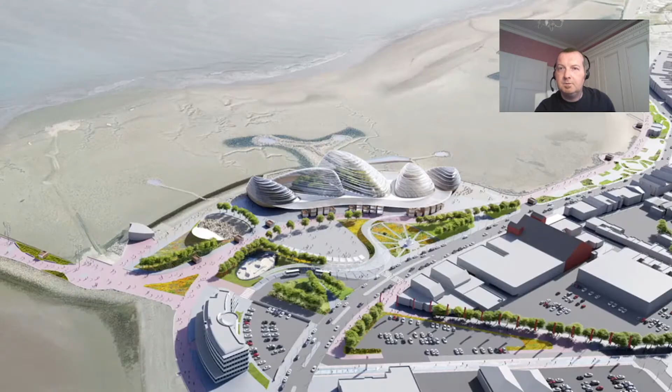This is the design from Grimshaw's architects that were released, I think, back in 2019 - a series of buildings that make reference to the shells, particularly mussel bed shells, that line the shores of Morecambe Bay. Now, the architects have made clear that the building is still an outline design, but the aspirations are for the scheme to reflect the rich sea life of the bay.

It's quite clear that the design of the proposition is very different from the existing context. Now, I say this not to be critical in any way of the scheme, rather just to recognise that the function and scale of the proposal is very different from that of its close surroundings, very similar as well to the Cornwall Eden project. So how does one design in this particular circumstance?

There's a clear desire for the building to reflect the form and shape of seashells on the bay, but there is of course equal concern of trying to make the building fit in with the context of Morecambe. Really this is a problem common to many architects and designers of buildings. How do you build between two competing sides that might be different in character? How do you build the in-between, navigating the need for new design but taking into account patterns and materials of the existing? This is a problem that raises a multitude of questions: heritage, planning, economic viability, and community decisions amongst others.

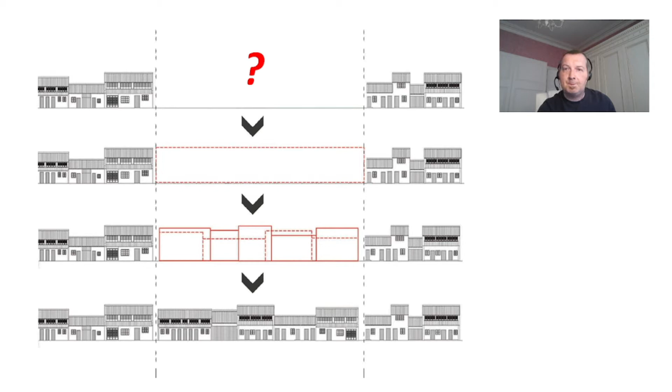I believe the problem described provides an opportunity to utilise machine learning. Machine learning effectively enables the deep learning of the visual character of a building's context. This learning can then generate a synthesized amalgamation that speculates on new structures or buildings within that context. The method I outline has potential to learn the patterns, textures, details, and shapes of Morecambe, both promenade and seafront, in order to inform the building of the new Eden North. What it does is affect a form of intercalation of the sea life, the seafront on the left, and the town, the promenade shown on the right.

But what are machine learning and generative adversarial networks anyway? Machine learning is available to a wide audience today through increased efficiency of computing processing power. Some call this artificial intelligence. I think that is somewhat controversial, but machine learning learns from trained datasets of information.

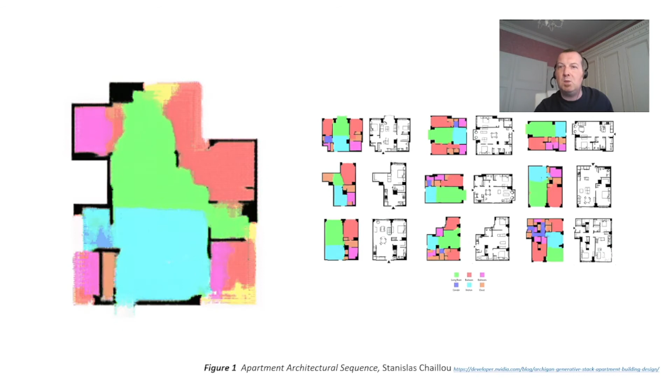This particular example works by building on the intelligence of the designs of the original dataset. So if most of the designs in the dataset position, say, the kitchen in a specific location in relation to a window, this new model will reflect this if asked how it would predict where the kitchen should go given the same window location. But the researcher doesn't just stop there, he also experiments with other datasets too.

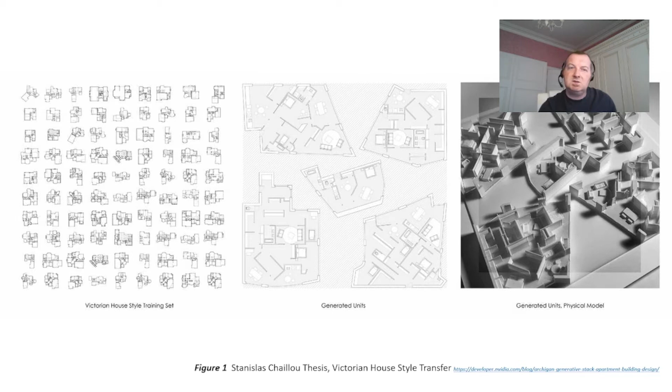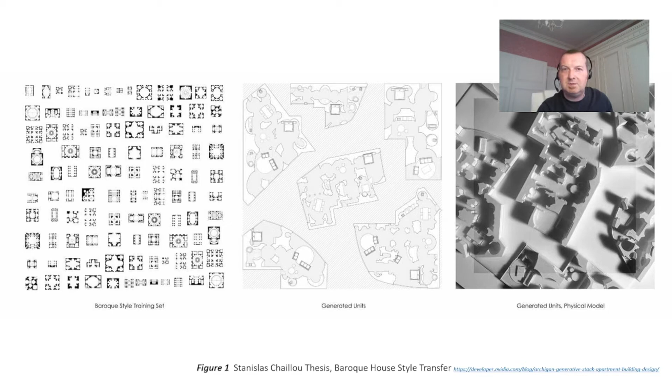He applies stylistic changes to the floor plan. In this example, he uses a dataset of Victorian typical housing plans to train a GAN, which then alters an input to suit that of Victorian architecture with the output on the right. This is the Baroque dataset, using Baroque church plans, that then synthesizes new plans to pick up the Baroque unique column and wall geometries typical in the style. Finally, an example of two-story housing as style transfer.

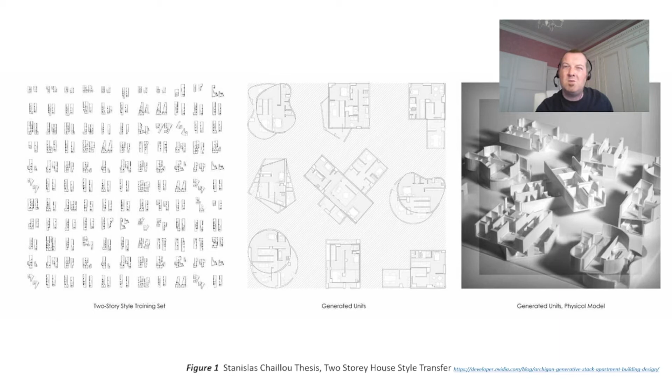I think it's worth noting with all of these examples that they use freely available datasets that are not specific to place or to location. The datasets are often universal, and it's often rather difficult to trace where they come from and what explicitly they mean in the context of the training.

And so on to section 3, a new typology, hyperlocal vernacular.

Going back to the slide earlier referring to hyperlocal vernacular, perhaps you can understand more easily now why I'm describing this as a new typology. It's the first time anyone has described a methodology that learns from a bespoke local dataset contextual to the location of the target. Previous examples shown rely on machine learning using universal datasets, which might originate from any part of the globe or any application, so bias is a concern and the origins are unclear.

So what I propose is the creation and training of a bespoke local dataset, and this hasn't been trialled before in this application. The clear benefit of this approach is both in the veracity of dataset origination, and in the geographic relevance of the dataset to the target. This is particularly important, I think, for contextual building.

In terms of my approach to the dataset, I decided to test a dataset that took into account the facades of the Promenade from approximately 1 kilometre either side of the target site. Although a relatively arbitrary measurement for a first test, it did coincide well with the natural start and end of 3-storey buildings and above along the Morecambe Promenade.

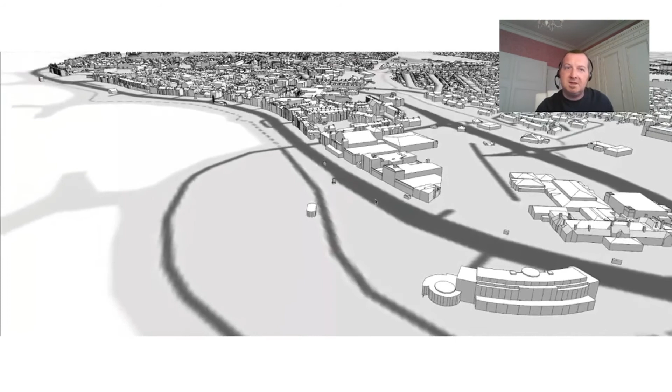In order to record the images, I set up a high-definition camera recording at 60 frames per second within my car and drove down the promenade on the route shown. As you can see from the model, which was designed and compiled separately, the promenade building height is relatively consistent, so I was able to relatively easily use the camera to record the full height of the facades along the route. I was also able to obtain many of the original drawings of the buildings recorded, just to verify the relative scales and heights to ensure features were translated appropriately.

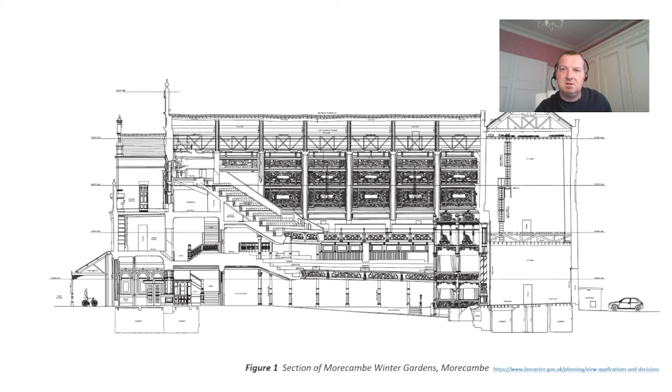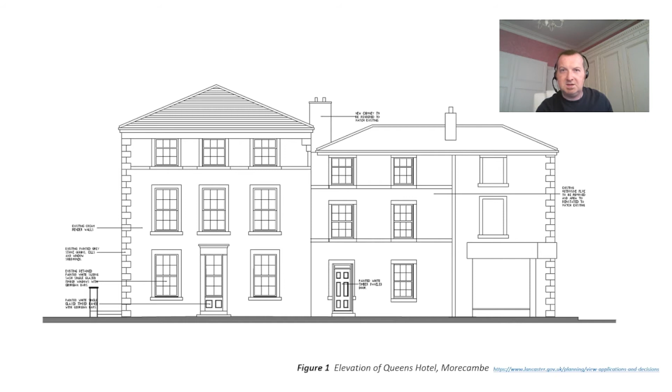For example, this is the section of the Winter Garden showing this incredible auditorium currently undergoing refurbishment. Drawings of the Pleasureland building referred to earlier, obtained from Lancaster Planning portal. And here the Queen's Hotel on the promenade too. These drawings helped me stitch together the photos and put together a fuller picture of heights and features. This is what the promenade looked like in 2 sweeps.

This is the individual dataset with images taken from the video chosen on the right. I discovered that 4K and 60 FPS recording of video were really key to ensuring I was able to take suitably detailed still images from the video, which would then contribute to the dataset.

So, onto the training of the data through the GAN. For those interested in my setup, I was using Google Colab with an NVIDIA A100 Tensor Core GPU with pix-to-pix HD running from GitHub at 2048 pix squared. This one ran for 100 learning epochs in total and took about 8 hours.

On the left is the input, which is the black and white lines. In the middle is the synthesized image, or the guess from the training of the software, and on the right is the real image. As you can see, as epochs move forward, it's beginning to pick up more and more features, getting the color right. Generally it's moving to a more accurate and defined definition of the buildings as training increases.

This GIF isolates the synthesized images shown over the 100 epochs from 1 to 100, and you can see here how it begins to improve with accuracy of texture, detail, form and color over the advance of the epochs.

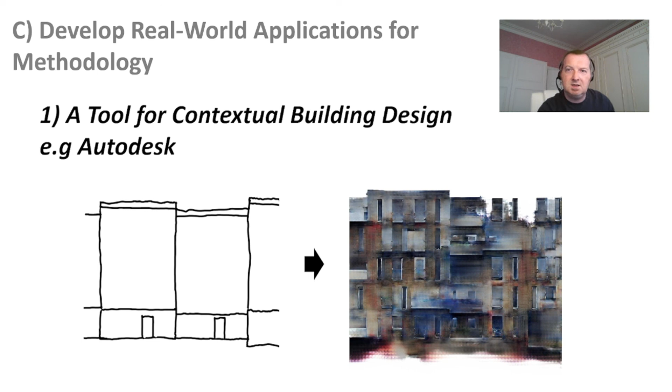I think the research has application to heritage conservation efforts. For example, one of my parallel projects looks at the problem of UNESCO World Heritage buffer zones - the zones between World Heritage sites and new developments that risk the status of the original site if development is not sympathetic to that heritage.

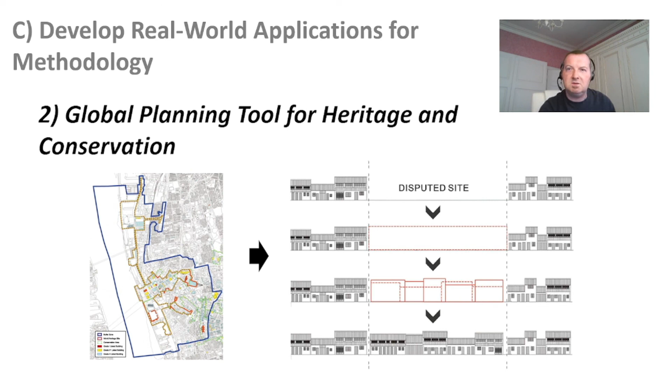Finally, building on this point, and in conclusion, I believe the method may in future provide a useful tool to allow stakeholders to co-design new schemes or to plan new areas in cities by varying the existing dataset of the city to try to strike a balance between competing priorities.

So, for example, in the example given, a dataset might be altered to option the design of a new building between multiple stakeholders who decide to emphasize community design and zero carbon features with pre-1950s architecture that surrounds the site. And that brings me to the end of my talk.